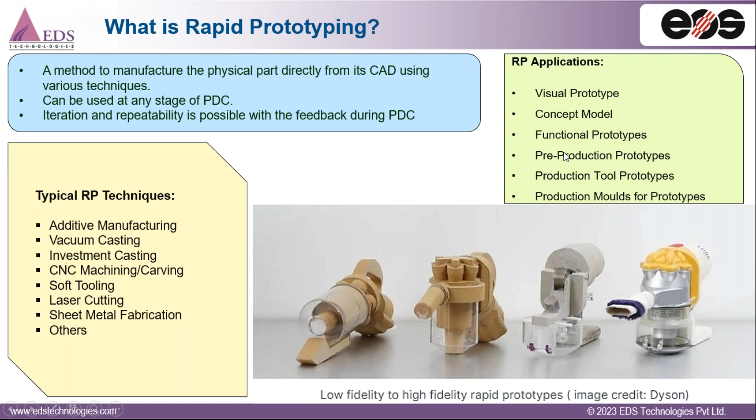What's additive manufacturing? It's very simple to understand the concept - you have a CAD model, and you slice the CAD information into hundreds and thousands of layers, and those layers are cured by a particular method, and that's how you get your final model through 3D printing.

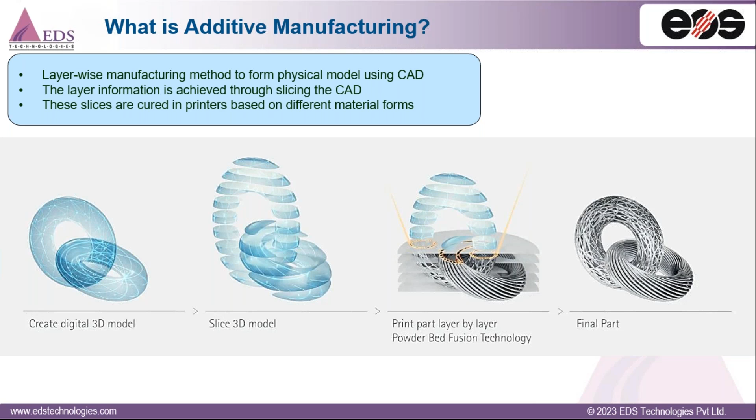Based on the materials available in the market, additive manufacturing has been classified into many types. Based on powder, there's selective laser sintering, SLS, selective laser melting, electron beam melting, and then there's a technology called DMLS, direct metal laser sintering, and powder-based binder jetting and MJF are also available.

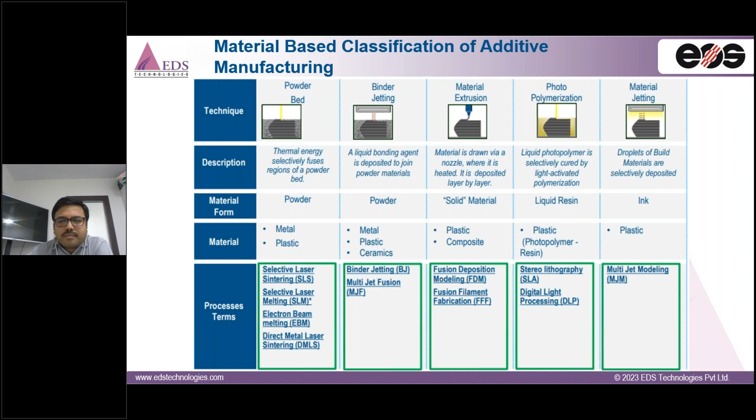When we talk about solid material, that technology is called fused deposition modeling, the FDM technology, and triple F technology, which is fusion filament fabrication. The third type is when the raw material is in the form of resin - we have stereolithography, SLA, and nowadays there's a trending technology, digital light processing, DLP. Finally, ink-based technology is available, which is multi-jet modeling.

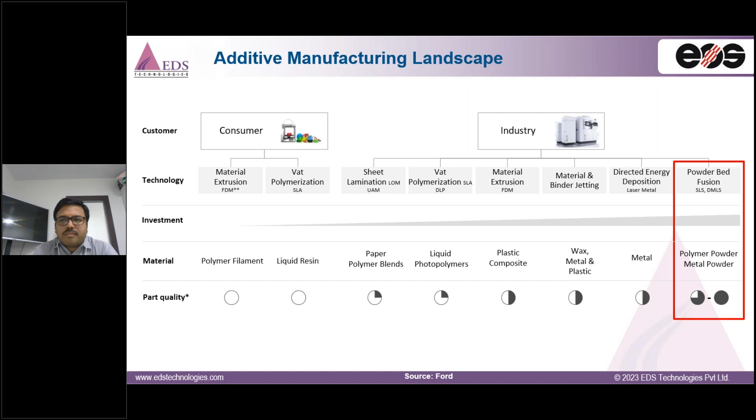Moving forward, looking at the landscape of technologies available for rapid prototyping, the most promising in terms of part quality is powder bed fusion technology, which is more reliable and gives prototypes with very high quality. It's evident from the study given by Ford that powder bed fusion technology is very trending out of all options available for rapid prototyping through additive manufacturing.

If we talk about performance-based AM technologies, we've focused mainly on metal-based additive manufacturing technologies - whether it's laser-based powder bed fusion, direct energy deposition, material jetting, electron beam-based powder bed fusion, wire-based DED, or material extrusion. There are several technologies available in metal also. We've seen that laser powder bed fusion has the highest potential to reduce cost, and it's very promising in terms of part performance and part cost. It's shown remarkable results when it comes to the end product of the prototype or any functional component.

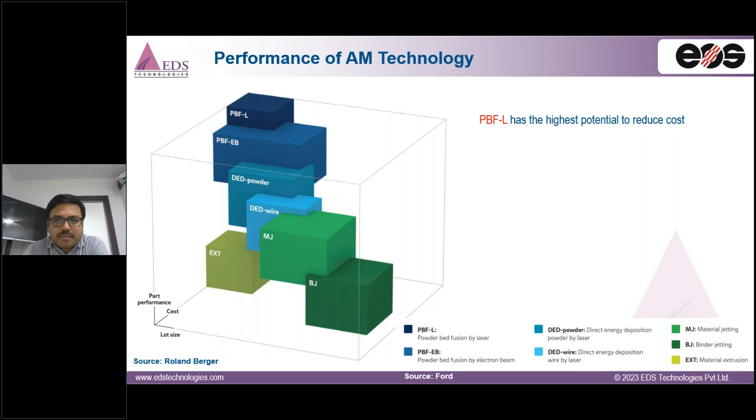In a recent technological survey, we asked approximately 87 AM service providers from different countries, and it's very evident from the graph that end users have been asking for powder-based, especially laser-based powder bed fusion technology, which is SLS and DMLS. 61% of responses were in favor of SLS and DMLS technology.

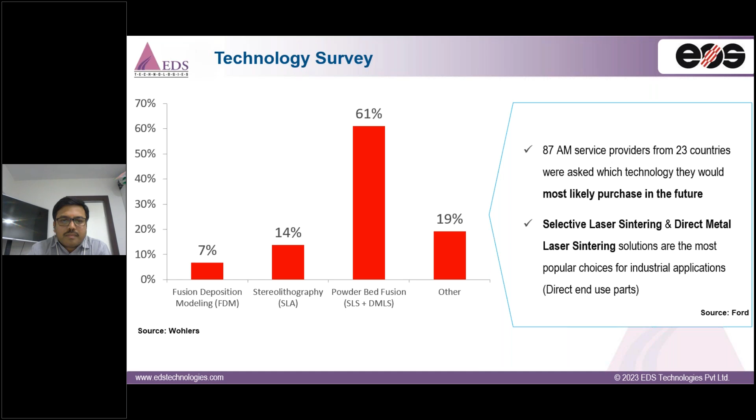So now we have seen the different kinds of technologies available. Few of those are emerging technologies, few are very old technologies. With this, we'll begin with our laser-based powder bed fusion solutions. So what exactly is laser-based powder bed fusion?

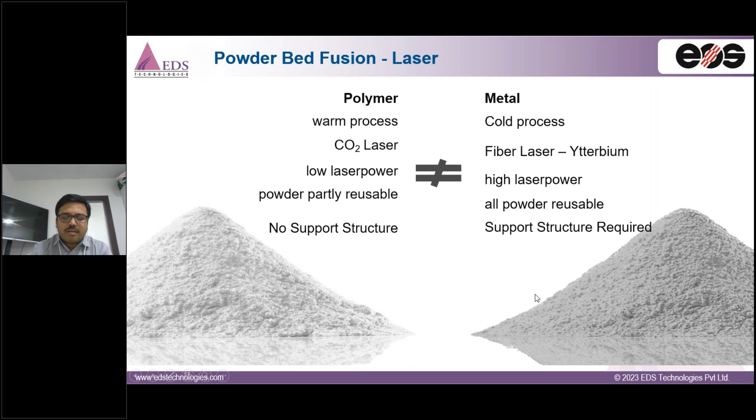Raw material is basically available in powder form. In case of polymer, the differentiation here is that the systems are different. Polymer systems handle polymer materials, and metal systems handle metal materials. They differ in that with polymer, we heat up the powder and sinter the cross section of the material with a CO2 laser. We can reuse the powder in this SLS technology, and there is no support structure required in the polymer scenario.

When it comes to metal, it's completely a cold process, meaning the powder doesn't get heated. In case of metal, it uses a fiber laser with slightly higher laser power, and all powders are reusable in this case as well, but you get some amount of support structure. Later on in the webinar we'll discuss how those support structures can further be eliminated.

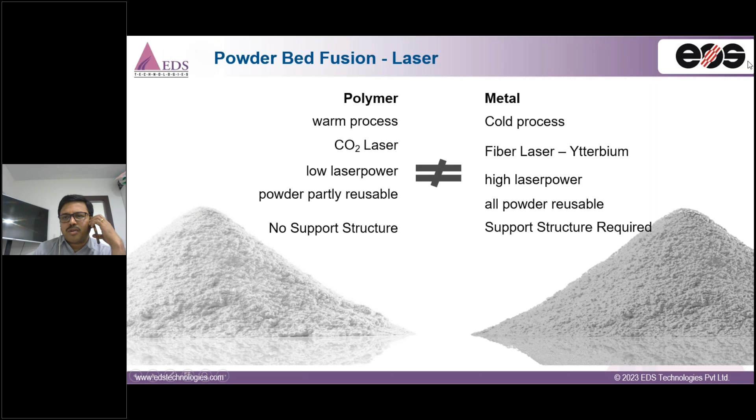So we'll begin with our first solution, which is SLS technology. SLS stands for selective laser sintering, as I earlier mentioned. It uses the laser directly to sinter the material, and curing is very fast within the chamber. The printing happens within a closed chamber. SLS technology is available in polyamide, elastomer, and styrene-based materials.

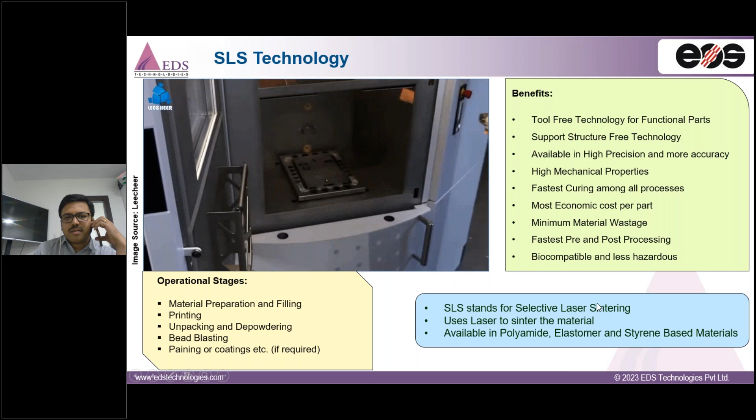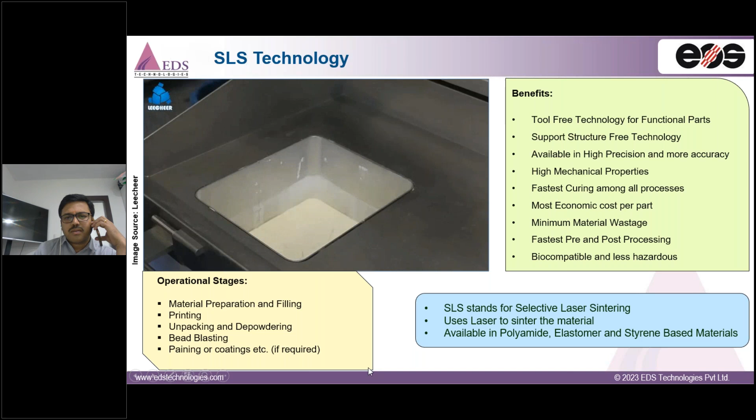The operational stages are quite simple. It's very easy to use SLS technology, EOS-based SLS systems. It just involves stages like material preparation, filling, and printing of the material. Then we unpack the printed materials, we depowder the components, and we do some sort of bead blasting, and then your parts are ready to be used directly as a functional prototype.

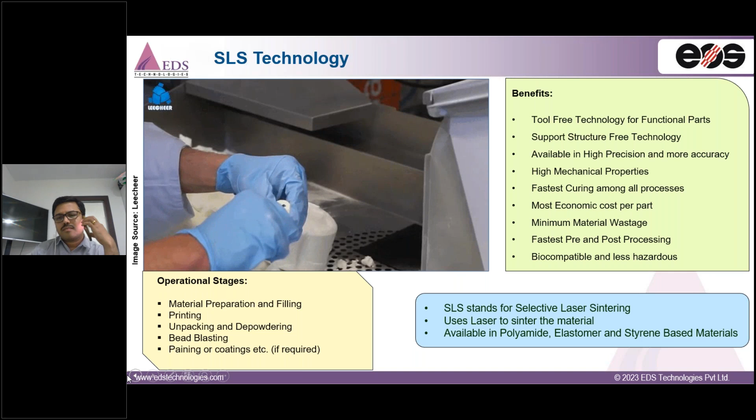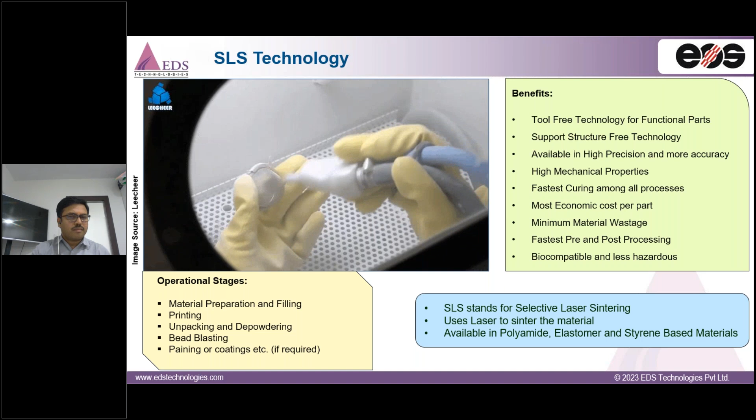The benefit of SLS technology is you get a fully functional and reliable part without a tool. So it's a tool-free technology, and it doesn't involve any support structure. So it's very easy when it comes to post processing. You can directly use your component just by doing nominal finishing.

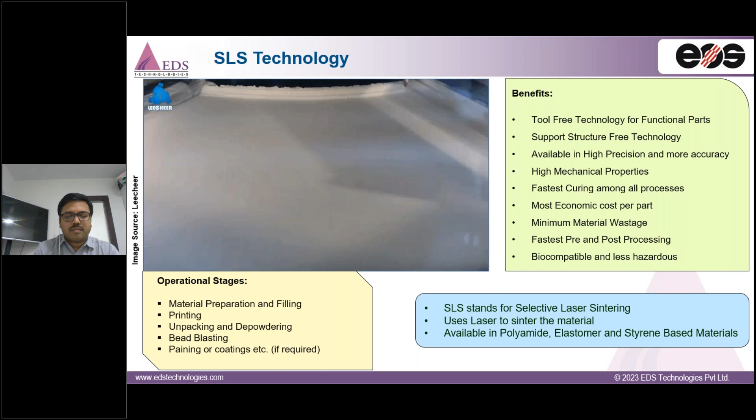It's available in high precision and more accuracy form also. So there is another laser which we use, called fine detail resolution, FDR, and it's pretty accurate in detailing the features of your component.

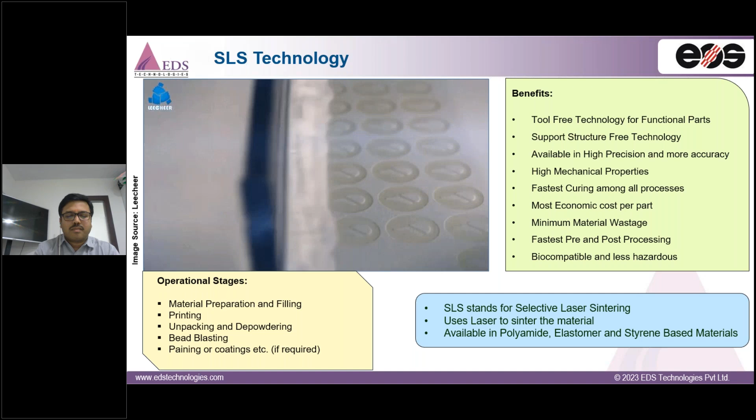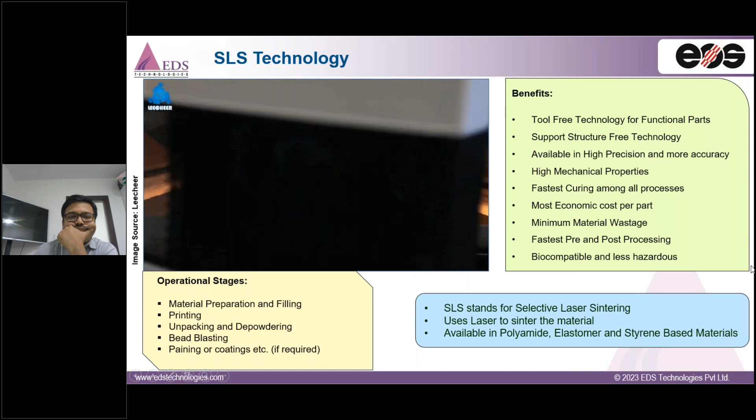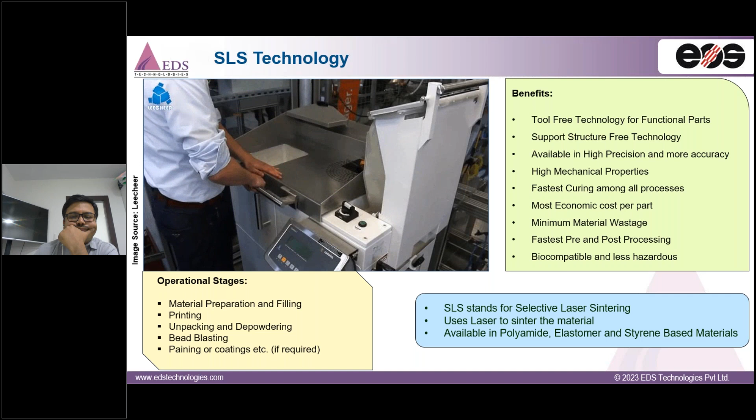The materials of SLS are high in mechanical properties. The laser process is fastest curing among all processes, because it just has to scan the area, and once all layers are finished, your parts are ready. So it's quite fast, and SLS parts are most economic when it comes to cost per part. So unit cost compared to all other processes, SLS technology gives a great and better unit cost.

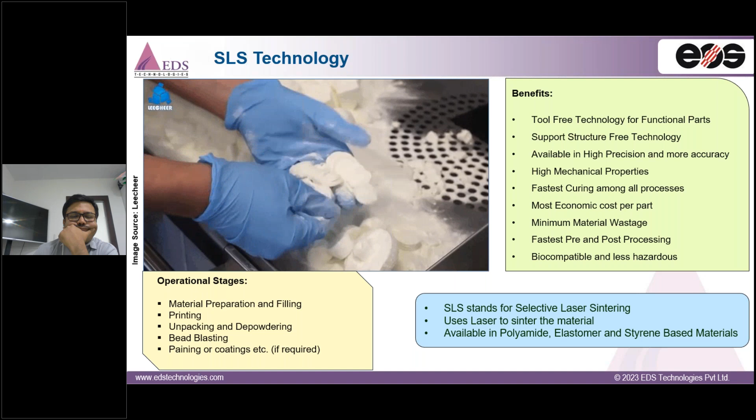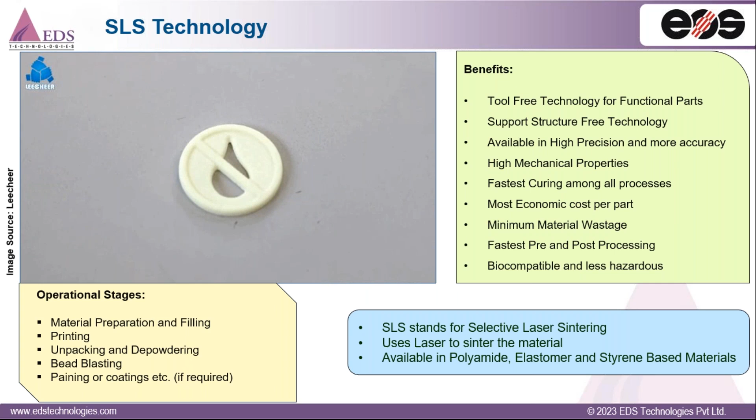And it's fastest when it comes to pre and post processing. It's very easy to get the machine ready for printing, do the post processing, and get the parts ready for further use. The materials of SLS are biocompatible and less hazardous when it comes to operations. You don't need literally any cleaning agents later on when you print the parts. So it's very good to handle, very easy to handle the EOS SLS technology.

Moving forward, what are the factors which better position the SLS technology among other powder-based technologies available in the market?

So this SLS technology is available with the purely polyamide based material, and you get your part just like injection molding does. In injection molding, typically you press the heated material in a cavity of the mold, and you get your part. Likewise, in SLS 3D printing, you heat the cross-sectional area and you melt that particular area to form your 3D printed part directly.

There is no filler, or there is no binding agent or detailing agent required in it. So further, it doesn't have any cost involved, and any challenges and timeline challenges involved in the process. It's just a quick process: you just start your build, and next day you get your part.

Though there is a natural form of the polyamide available, there are other forms of the materials also available. Like injection molding, you can get a glass filled material, and you can get carbon fiber and aluminum filled material also. You can get fire retardant materials, and fire retardant materials are FR classified and certified materials.

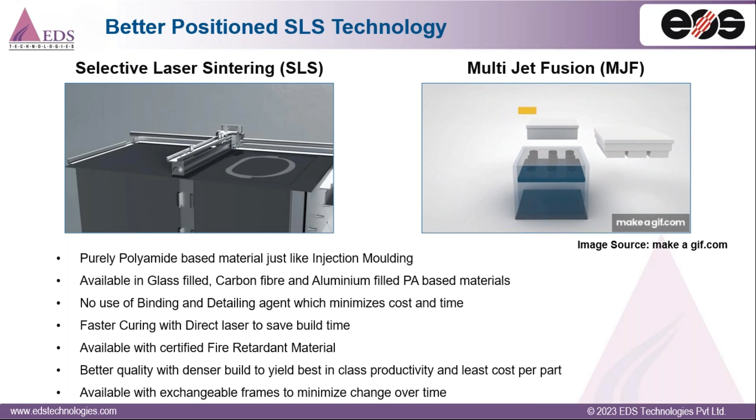And the SLS parts are better in quality, and you can fill as many parts as possible within the build chamber to densify and to leverage the space inside the SLS printing chamber. So doing this, you can have best-in-class productivity and least cost per part. It's available with exchangeable frames and all other accessories, which minimizes the changeover time. So that's how the SLS technology is on top of any other technologies available in the market.

Coming to SLS versus FDM comparison, there are many. First of all, there is no apple to apple comparison of the SLS technology and the FDM technology. However, sometimes in industry people have a mindset and they correlate 3D printing directly with FDM, because it's more seen in the market. So they feel 3D printing is only available in FDM, but FDM is a very initial technology, and it's very basic technology. With FDM, you can print parts just for realization, but you cannot use them in as good a manner as you can with SLS parts.

So when it comes to cost, SLS parts you can print literally with no support structure, so there is no additional cost involved in the SLS process. While in FDM, you have to invest in dissolvable or non-dissolvable supports that will be again hectic when you go to post process them, and it involves many costs that increase the per part cost.

And the materials that are available in SLS are all industrial grade certified materials, which are biocompatible and fire retardant compatible. They're leak proof. They've been tested for leak proofness, and there are many more certifications available with the SLS materials. While FDM materials are very basic, and it's just to realize the concept of the model or the CAD.

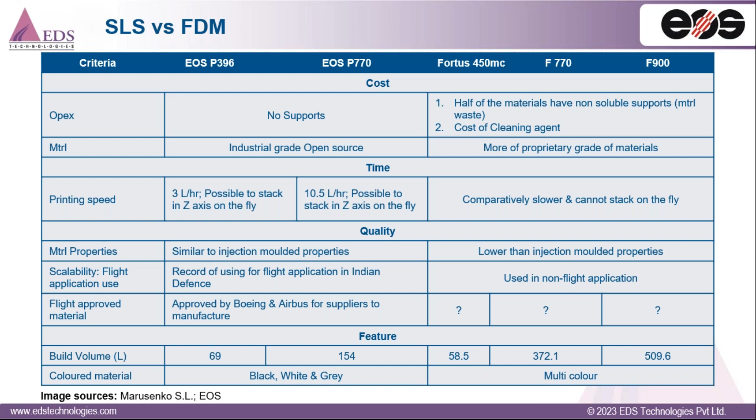SLS materials are available in black, white, and gray, but later on you can paint them. You can do the post processing as per your application. You can use them. FDM materials are available in many colors because of the fact that they can be used for fancy models and all.

When it comes to choosing additive manufacturing or any polymer material for the application, you have to decide on certain criteria like service temperature or heat deflection temperature, or the kind of polymer, whether it is chemical resistant or water absorbing, or whether it's a commodity polymer, an engineering polymer, or a high performance one. So in EOS SLS systems, we have various categories of thermoplastics and a few amorphous materials.

We have polystyrene based material. We have a broad category of nylon based material, which is engineering plastic, and offers you a service temperature of more than 110 and 120 degrees at least, and even more with the glass filled and carbon filled materials. Then we have high performance polymer alloys, which I'll discuss later.

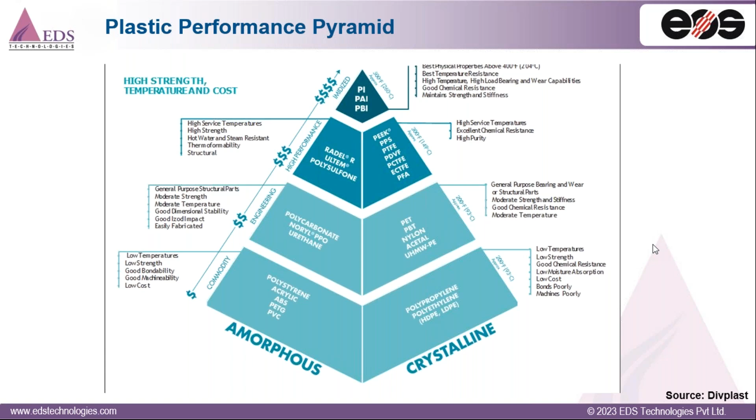And we have exclusive polyamide material, which is a mixture of polyamide and aluminum. Then we have a polyamide 11 material also available with us, which is more elastic compared to polyamide 12. And all these polyamide materials are very much reliable, and they can offer you the properties in a very good way that no other technology can give.

And then we have PrimeCast and polystyrene based material, which are used typically for the investment casting process and in packaging industry. We have elastomer, which is urethane based thermoplastic material used for your seat or cushionings or any kind of application which requires rubber like properties. And then we have high performance polymers, which are PEKK carbon filled and PEEK material HP3. These all materials are processable through EOS systems.

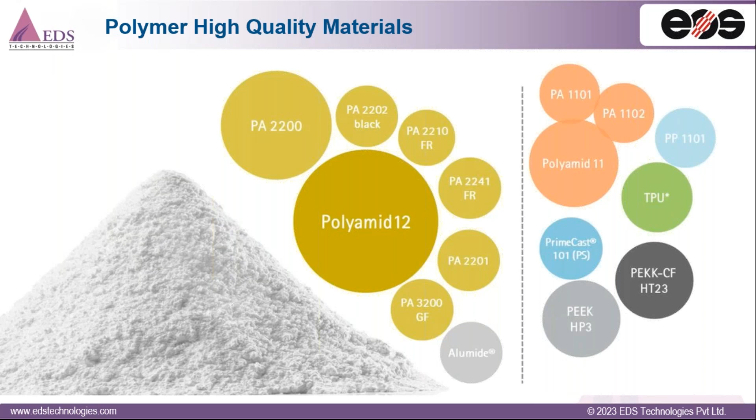So when we call polymer high quality materials, we mean it with the fact that the properties which are tested on all material are up to mark. So let's see what the properties say. We have prepared a thorough comparison between the injection molded materials and the additively manufactured materials.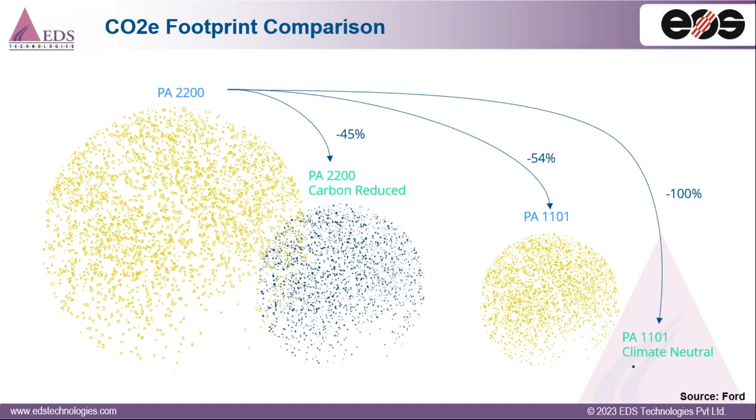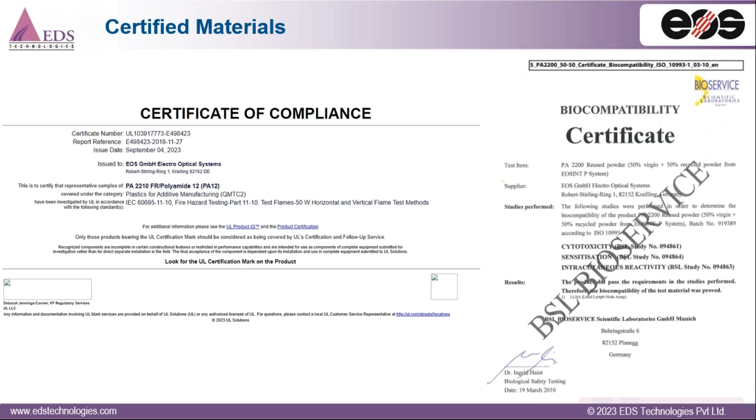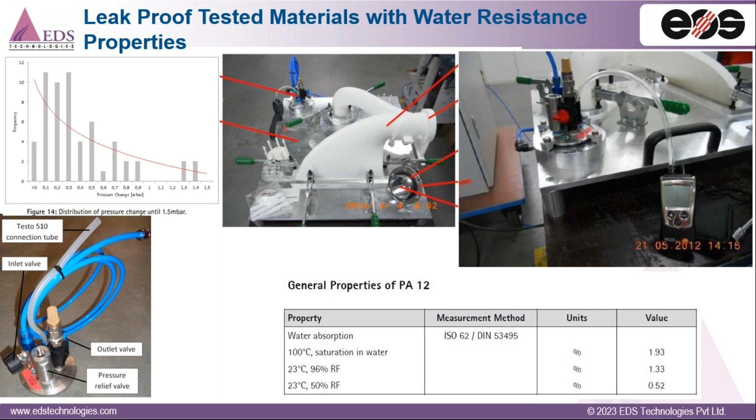So EOS SLS materials are all well certified for fire retardant applications, well certified for biocompatibility. And we have even tested the polyamide SLS printed components for leak and air tightness, as well as water resistance. So the material has shown significant water resistance values, and has shown very good leak test results. When you do post processing like vapor smoothing, you can further improve the water resistance in the material.

So from here, we'll begin our other technology, which is again a laser powder bed fusion, named DMLS. DMLS stands for Direct Metal Laser Solidification. It's kind of a micro laser welding process where hundreds of thousands of layers weld together to form the 3D model in an inert atmosphere. So with the fact that they are inside a closed chamber, the probable defects are very minimum in the material. The chances of porosities and foreign particle inclusions and defects are very minimum in this case.

DMLS is available in aluminum alloys, steels, titanium, copper, nickel, cobalt chrome, and many other alloys, which are already tested and proven for EOS metal systems. And the technology is open to develop new materials as well. So you can use the same system to develop and convert the conventional form into powder form, and then develop it for your printer.

The operational stages for this are very simple, in the fact that you have to understand the technology, but it involves stages like material preparation and filling, same as SLS. You have to do sieving of the powder, and then refilling in the machine, and then you have to start the printing.

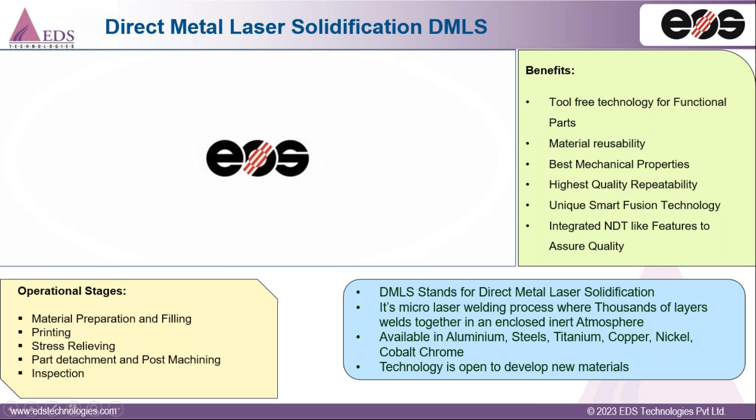So DMLS process is available, as I mentioned, in the form of the material. The types of materials available are aluminum alloys. There are several kinds of aluminum alloys you can use for your PDC castings, or for your sand castings or investment castings or extrusion forms. Any kind of component used in the industry, you can print directly without tooling using the DMLS process.

You can use the case hardened steel. The cobalt chrome material is available. Various kinds of stainless steels are available, SS17-4PH or 316L, or there are many more stainless steel materials available. There are tool materials also available which you can use for your pressure die casting or injection molding tool manufacturing, or even if you want to make a soft tool or any other tools, you can use these tooling alloys.

And this is available in titanium alloys. Nowadays it is available in copper alloys also. You can print a copper alloy, or you can print a commercially pure copper material directly through the laser based system. This is available in a broad category of nickel alloys also. You have a nickel alloy which you can use for applications like high temperature or high oxidation resistance or crucial environmental applications. You can use this material over there.

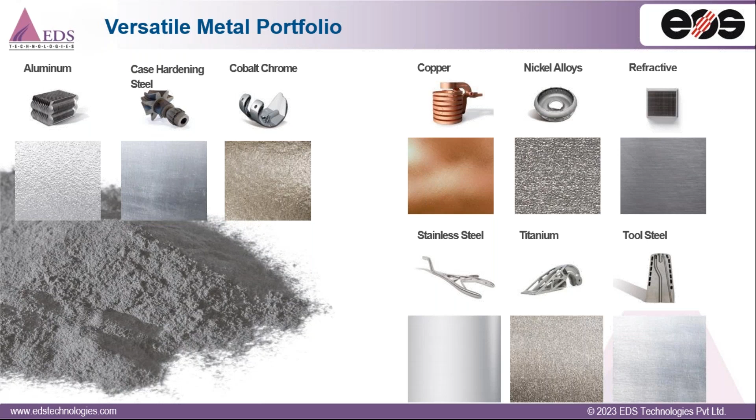So coming to the TRL, which stands for Technology Readiness Level Process Development, EOS classifies the technological maturity of all self-developed 3D printing SLS polymer materials and even 3D printing metal materials and processes using technology readiness level. So what are these TRLs? The TRL concept was developed by NASA and has since established itself in various industries.

EOS also divides its materials and processes into two categories: core products, which typically span TRL 3 to 6, and premium products, which span TRL 7 to 9 and are ready for use in series production. One of the goals of the system is to offer new materials on the market with a clear value proposition. So this is how we place our processes with respect to the standards that are available.

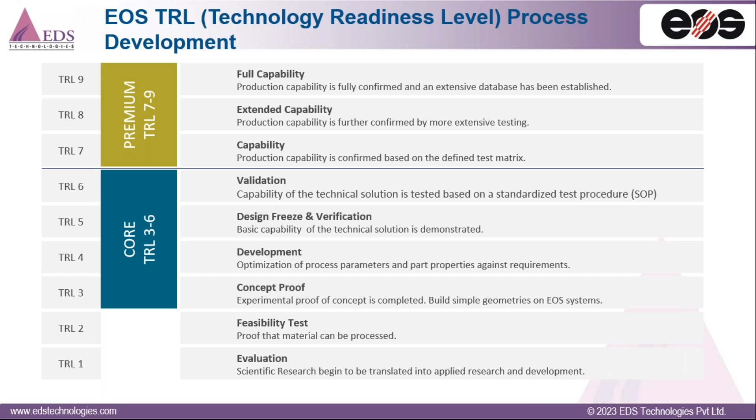So I was explaining about the smart fusion. Smart fusion is again an add-on with the EOS system, and a unique value proposition is that it's a thermal management system where we give the command to the laser to calibrate and change over within the process from layer to layer. Wherever the IR sensor senses the heat concentration, the laser decreases or increases the power, or vice versa, to reduce the stresses, and thus you have a chance to reduce the support structures.

You can increase the productivity. So the benefits upfront of adopting this technique: it's been seen that up to 75% of support structures can be reduced roughly, and you can increase the productivity 2 times to even 5 times. It's been seen it is improved, and you can lower the cost per part.

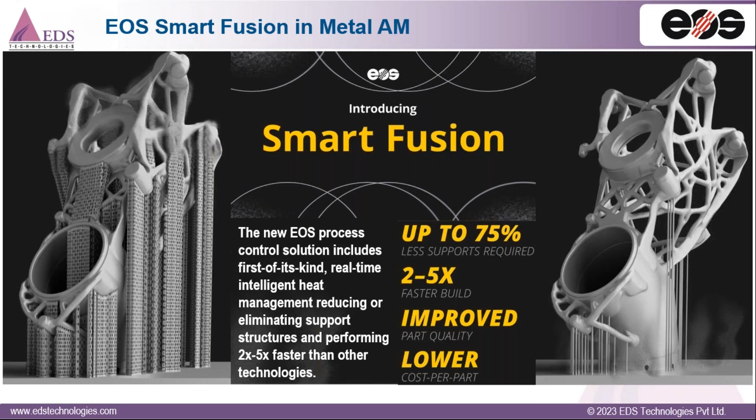So far, we have discussed prototypes. You must be thinking, well, are these AM systems available only for prototyping, or is there scope for production also? So in order to understand production, we first need to understand the trend of AM across industries. In early days, we used to think additive manufacturing is only used for prototyping purposes. Then some time back, we started doing small production batches, and started improving part quality, process robustness, and even optimization of cost per part.

So today we are at a stage where production can be ramped up with the best quality control and quality repeatability, and differentiation in many factors involved in the processes. The total cost of manufacturing can be reduced, and the system can be more automated with technology integration. We are also seeing the future. We have been seeing the trend in a few developed countries like Singapore and Germany.

People are facilitating multiple additive manufacturing machines, and they're calling it a print farm concept, which we call a digital factory. So you can literally have an AM cell within your plant, and you can have a SCADA-based system where you just give a command to the AI-based, optimized systems, and they will do the job for you, and literally it will guarantee the production. So that's how the evolution of additive manufacturing is working nowadays.

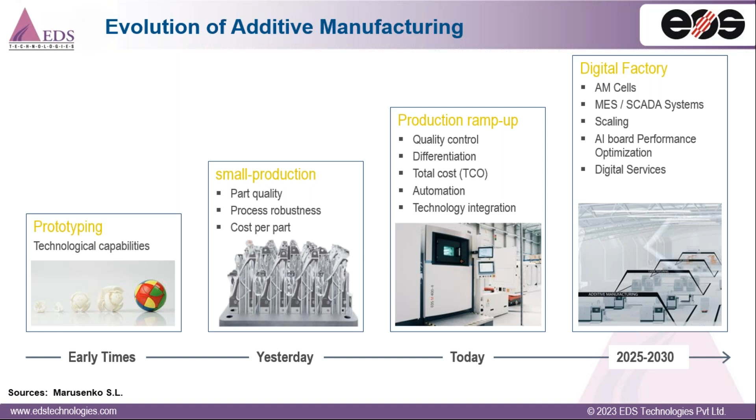So when we think about production, we first have to look at the cost per part, CPP, or unit cost in normal language. The first factor which comes to mind is the design. You have to optimize the design for additive. You have to focus on how you can optimize it further to reduce the cost, and then you have to look at the pre-processing, production processes and post-processing.

So these are the main factors where, if you apply optimization and establish a good value chain, you can end up with a good, reduced cost per part, which improves the chances of converting the part to production for a particular machine or AM system. So like any other technology, break-even exists, even for conventional.

So we tried forming a graph between the unit cost and the complexity, which we call a complexity graph. And on the other hand, we tried forming a graph between the unit cost and the volume. So with design complexity, where are the AM parts placed? Basically, it's been seen that additive manufacturing is applicable wherever the design is complicated, wherever subsequently the processes are complicated. So if your design is pretty complicated, like complex castings or injection molded complex parts, it has more chances of getting converted into additive manufacturing.

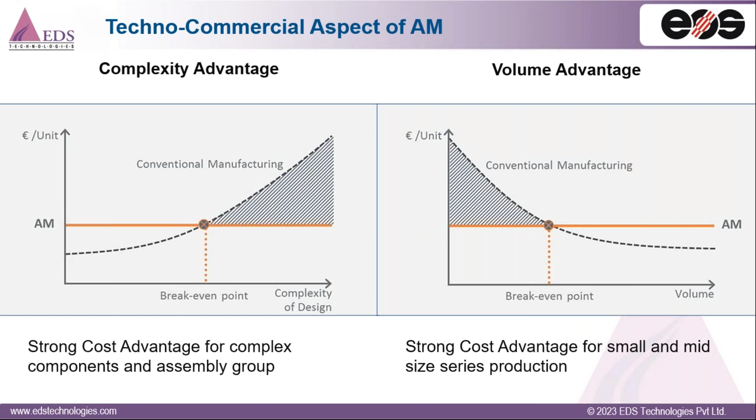If you are able to choose a part in the mid-size or small-size category for your particular system, that's where you start picking up, and you can implement the AM production process for a particular component and a particular system. So by reducing the mass, by optimizing the topology, by reducing the size of the overall component, and of course, the quantity matters based on your requirement, you can switch to AM production systems, for example, for spare part manufacturing or customized parts.

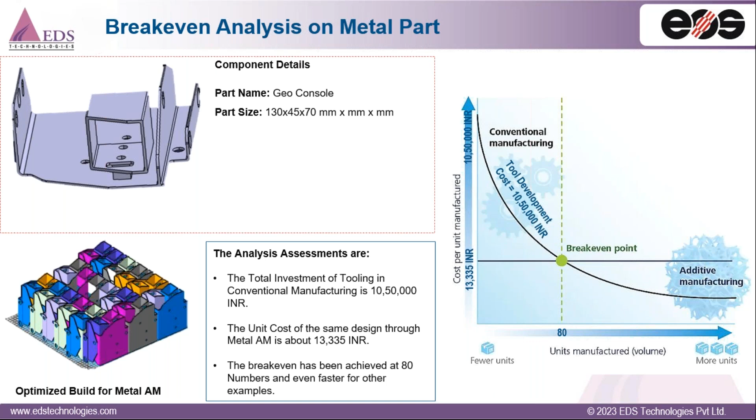So here, in order to better understand, we have placed one case study on a geo console of an automotive. It's a fabrication model which is manufactured through different kinds of sheet metal operations followed by welding. So the best part here is with additive, we have leveraged the benefit of consolidating the child parts and making it in an integrated way.

For a particular AM system, we have seen up to a certain number of quantities, which is 80 quantities, additive manufacturing has shown its best cost over conventional manufacturing. So it's very much evident. It depends: the production depends on how you are selecting your component, how you are optimizing your design, and what system you are using for the production.

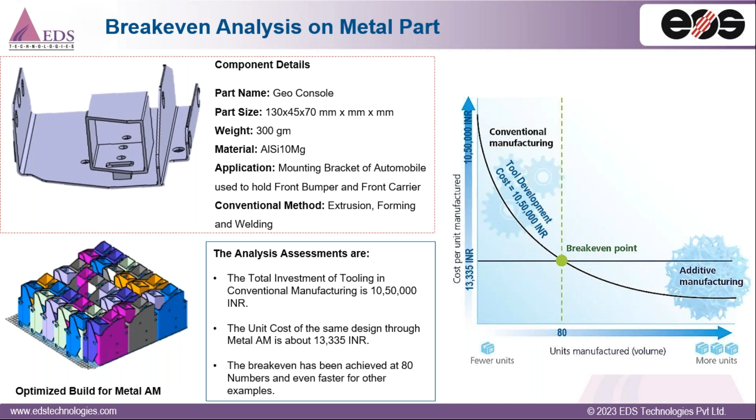Moving forward, let's try to understand what is not value addition, or what we call the conventional approach. So far, whoever is using additive manufacturing in the industry is following the conventional approach. If we divide everything in the form of a value chain, we get 4 stages: complex design, AM production, manufacturing process, and functionality of the component.

So the perfect case scenario is that parts have to be optimized for AM, while in real case scenarios, we always try to manufacture the part designed for and meant for conventional manufacturing. So that's where we are not able to leverage additive manufacturing. The second value chain parameter, production.

In the third value chain, manufacturing and assembly, typically we think that we'll be integrating the assembly. We have a chance to do the optimization, and we can reduce the number of assemblies. But in the real case scenario, we make the components individually and we try to assemble them in a conventional manner. That's why we are not able to leverage additive manufacturing technology for production.

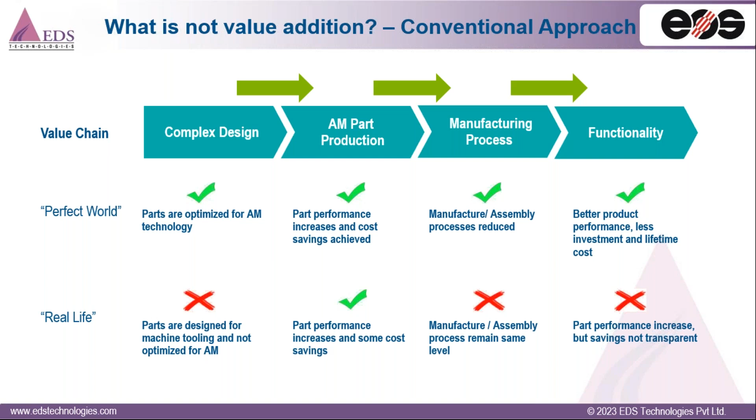So we saw the bottom to top approach. In order to leverage additive manufacturing technology, we have to do it the other way around, the top to bottom approach. We have to reverse it. We have to look at the functionality. We have to define the key value drivers responsible for functionality, and then we have to optimize the processes.

You can evaluate the cost savings there, and then we can establish the production process based on the production needs, and looking at all 3 factors, we can redesign the component and apply design for additive manufacturing, which will be suitable for additive manufacturing, and you can easily adapt the production method.

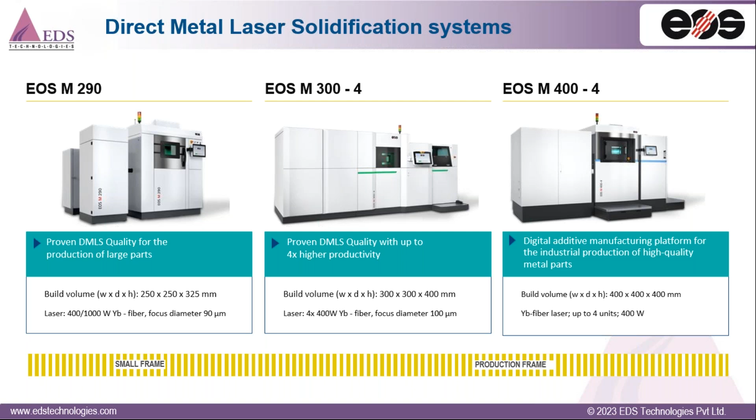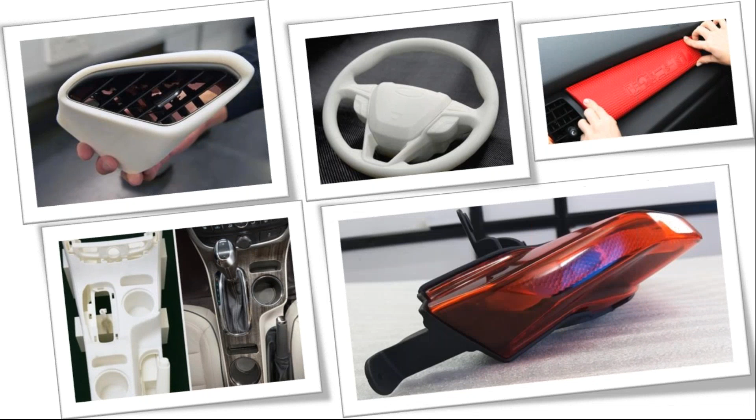So what are the different applications available in SLS? You can look at developing interior parts. There are many more applications which you can develop through SLS technology, all interior and functional parts. You can print dashboards, on-demand parts, AC vents, central consoles and optical parts, and even optical housings. Exactly.

There are applications where you can use FR material to develop battery casings and battery products, charging stations components, charging plugs, fuel tanks, exterior components, molds and seating components. There are so many applications that you can implement SLS technology into.

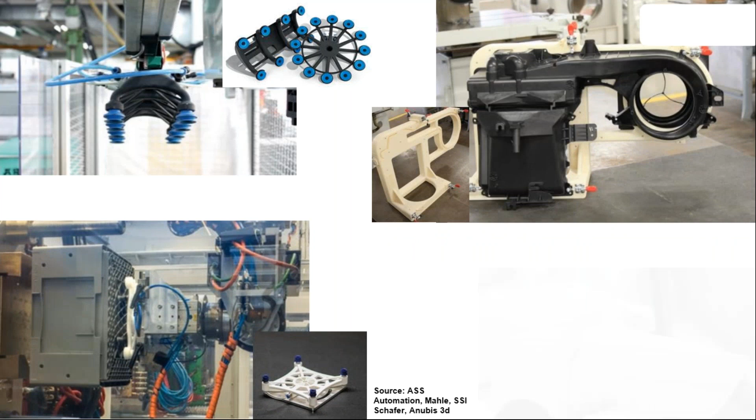You can also use this technology to manufacture fixtures or manufacturing aids, be it a testing fixture or a machining fixture, in either SLS or DMLS technology.

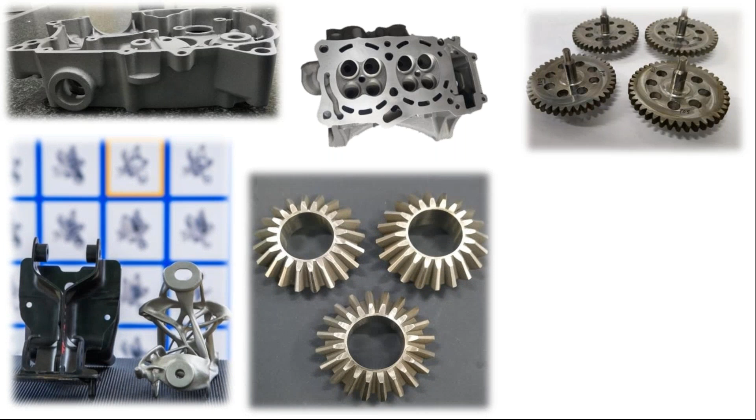Now moving to DMLS, metal 3D printing. With metal 3D printing, you can print PDC parts, different casting parts, forging parts, sheet metal fabrication parts, laser sintering parts, gear sintering, and customized toolings to perform machining.

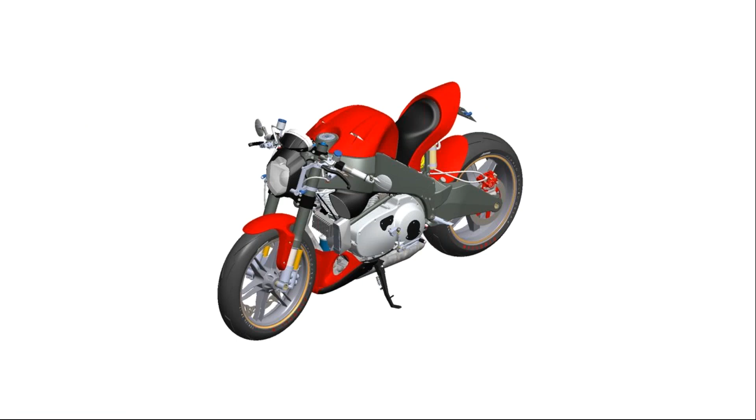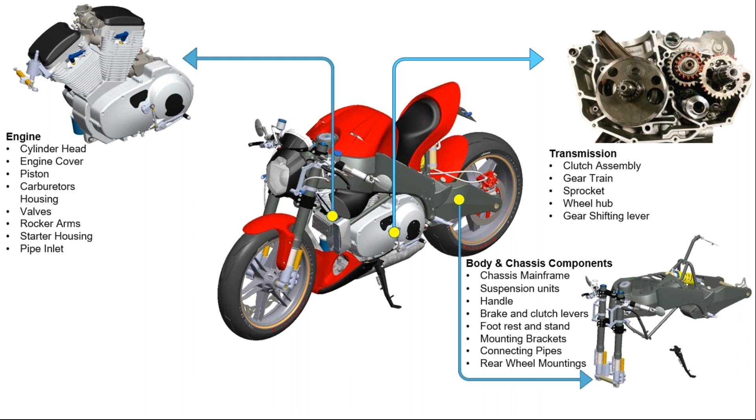For the last two decades, industry has been developing different kinds of components, from the engine segment to the transmission segment. In a typical two-wheeler, we can see body and chassis components, and exhaust components. There are many more applications that industries are already doing for prototyping.

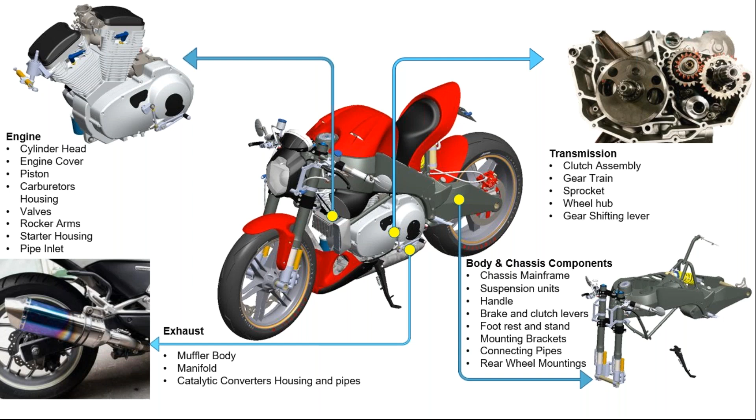And for batch production also. In a typical four-wheeler, there are so many subsystems, starting from the engine, or in case of EV drive motors, we have copper material for the application of drive motors. You can look at any component out of these two categories, polymer and metal, and develop those using the additive manufacturing SLS and DMLS processes.

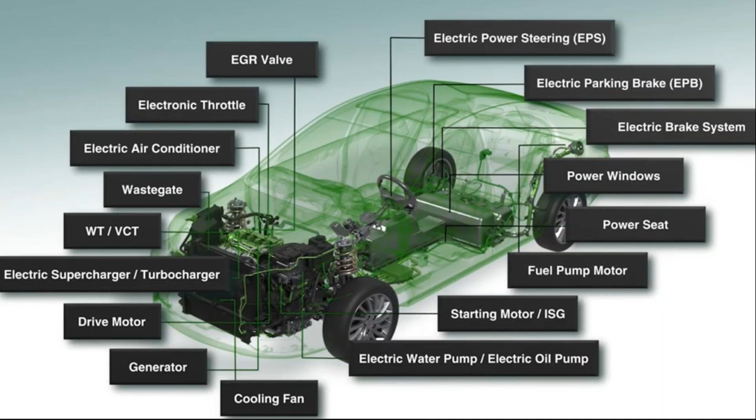Thank you, Arun. Hi everyone. Arun has given you very wide applications of additive manufacturing. I wanted to drill down to two value additions that SLS and DMLS technology bring to the automotive industry.

Just like any industry, we use tools - that's number one. Secondly, we make direct products as well. With regard to tools, we have multiple varied tools, right from manufacturing jigs and fixtures, assembly fixtures, and so on and so forth.

One very unique application would be die-cast tools. This is one such part done by one of our customers overseas. This is an HPDC part made with aluminum. The end product is aluminum, and they see some areas where smudges are being formed.

Some thermal mismanagement is happening, so you have a very high hotspot. Things like that go wrong, right? So they told us, okay, what do we do about it, because our end product quality is going down?

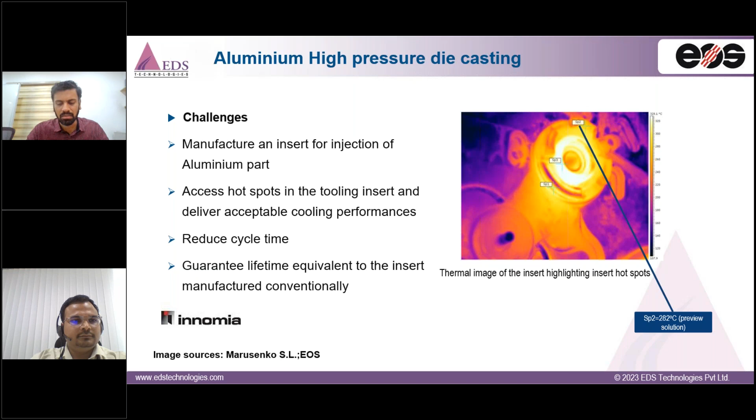Whereby you could avoid all these product quality related issues, whether in soldering, or if you wanted to increase productivity, then probably during your cooling time you can reduce your cooling time because you remove the heat directly from the product, in a very fast manner. So this is what they have done.

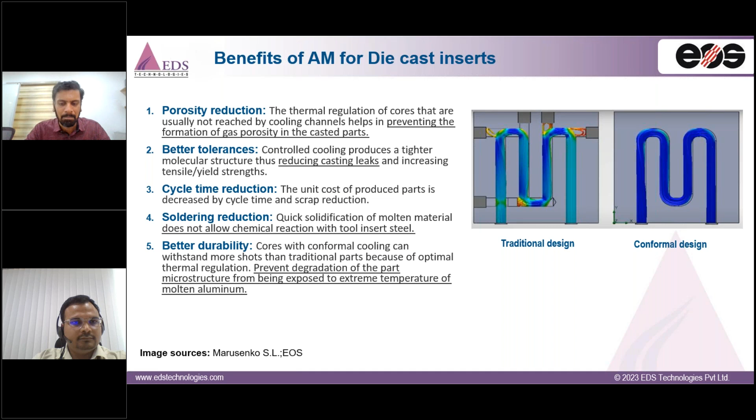They changed the design which goes inside for cooling, and whereby now the hotspot, which was 200 plus degrees, is just 100 plus degrees. So if your hotspot reduces, then probably you have better cooling time, which means your cycle time reduces, which means your productivity increases directly. So this is one unique advantage I see, where a little engineering could help along with additive manufacturing.

Now, we are not into very mass production, so if people ask me when will additive manufacturing go into mass production, I say we start with tools. And this is one such application.

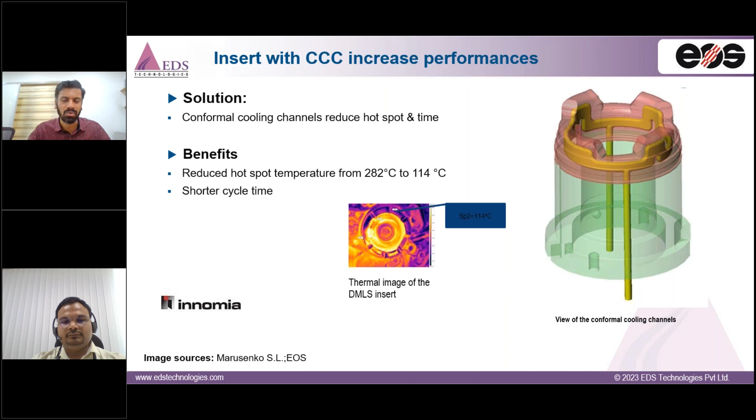Right after that, we machine it. So people also ask us, okay, I have a part, can I print it and get the finished part directly? No, it is not always the same. We have some post processing to finish it, depending on different applications.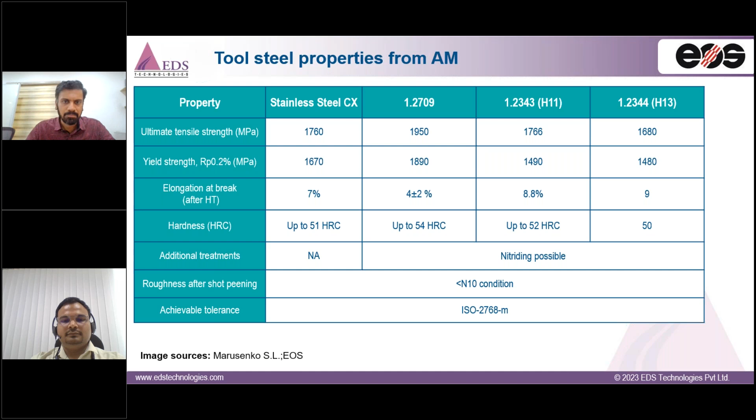This is one such application done for Silverado, the four-wheeler truck in US, and they wanted to reduce the build time. So there's one application where they introduced the conformal cooling channel and were able to realize this application.

Coming to direct parts, predominantly automotive industry was the one who drove the rapid prototyping market, right? So under rapid prototyping, we had vacuum casting technology, wax modeling, wood modeling, and so forth. And then came 3D printing.

Now we are moving from this proto to pilot production stage, and in some cases direct production, such as in EV also. If you ask us, overseas we have three categories of applications that OEMs are driving.

Number one is customization, where if somebody wants to have a unique feature for their cars, a very personalized feature, then they go ahead with customization.

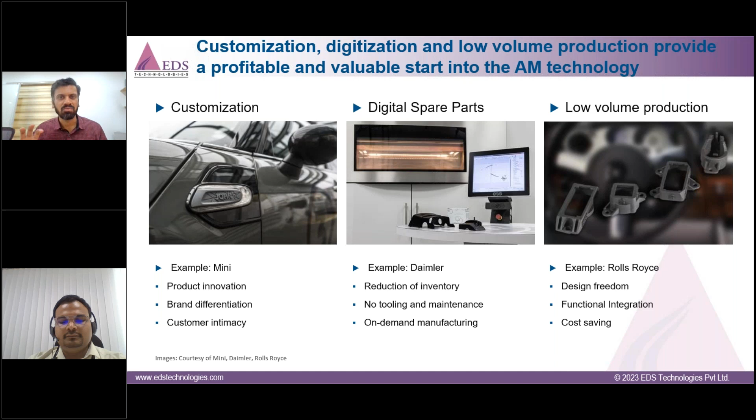And somebody wants to reduce their inventory to minimize their supply chain, probably then they go ahead with digital spare parts, aftermarket parts. And sometimes you can also do low volume production for some of these parts, where the tooling cost could be higher than 3D printing.

So this is one such application done by Mini, basically side scuttles and trims where you can write your name and then print it in, and it is very unique for your application. Of course, the value here is a customized product.

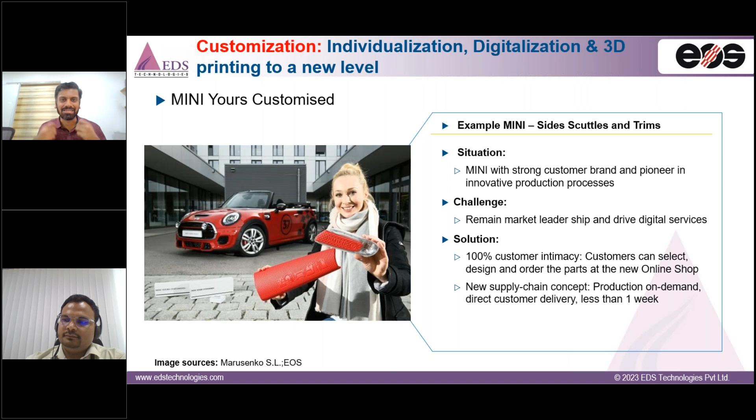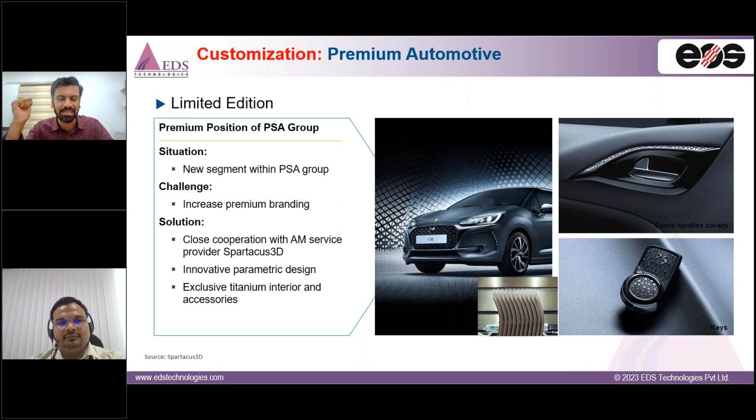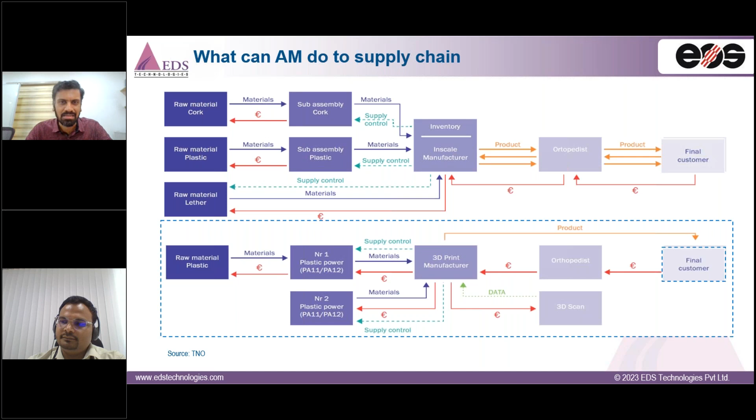I take this example from the medical industry, where let's say a patient has a fracture and goes to an orthopedist, who says, I have a standard set of implants which I get from a manufacturer, and then I give it to the patient. Now, what if the orthopedist goes to a 3D printing manufacturer? He just has the raw material, and it is very unique to that customer, suiting their requirement. This is what the customization industry is also thinking about - can I make a customized product for one customer? This is the value they think about, and of course there is a little premium to it, so cost also plays a factor.

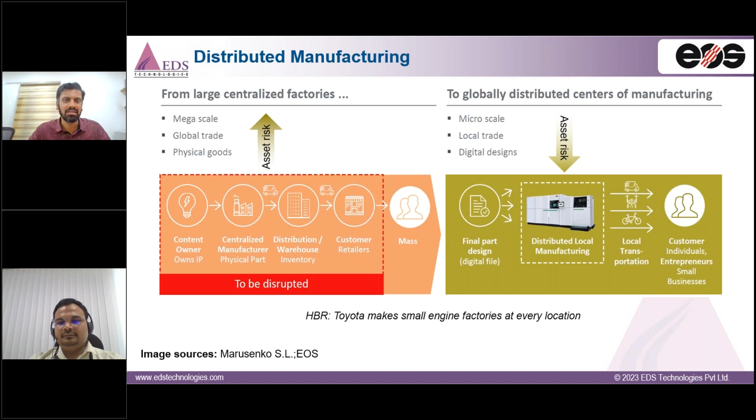I read recently in a business review that Toyota makes small engine factories wherever they go. Whereas in one case, GE Appliances had a very big factory and there was a fire accident, and the losses were phenomenally high. So the idea is, can we have a very modular industry, very localized to that particular geography or demography, and then meet those customers' needs? That's the thought process.

So what CAT did is, this is one of their excavator products, and they printed it in 80 hours time, roughly about 4 days, a metal 3D printed part, and delivered it in 4 days time. Really amazing, right? Instead of shipping from one country to another, it was locally printed and given to the customer in 4 days time, less than a week.

I think that makes a lot of economical sense. Similar to that is Daimler, who have also done a number of these parts. Almost 3 lakh parts were there for EvoBus buses. Some of these buses are very obsolete, and we cannot carry the inventory for a very long time. Especially if we work with defense, we come in saying that for 10 years we at least support your asset. But beyond that certain period, how are we going to sustain these assets? It's a big question mark.

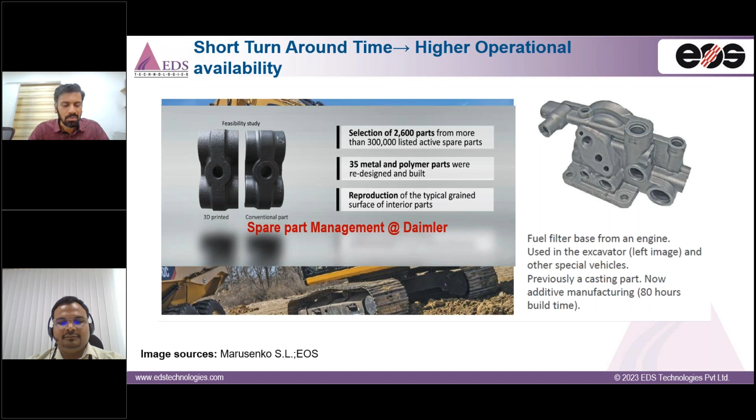So they came to us and we worked along with them to screen these parts for additive manufacturing. We said, among 3 lakh parts, 2,600 parts will be suitable for additive manufacturing, for which you don't have to carry the inventory. Some of these parts were redesigned for additive manufacturing where they could enhance their functionality. The one you see here is basically a conventional and 3D printed part, how they are using it. So that is how the localized factory is planned to go.

Another question people ask us is, okay, additive manufacturing, fantastic geometry, good value additions, and everybody is looking at additive manufacturing. What will it offer? The biggest question is, how about the cost? Is it affordable? So let's say we work in lathe or CNC, we work with parameters such as speed, feed, depth of cut, hardness of workpiece, hardness of tool, and so on. We control these parameters in such a way that we meet the customer's requirement.

Similarly, additive manufacturing has a number of these parameters. They work around with these parameters and try to meet the cost without sacrificing the quality. There's no trade for this quality, but how can we reduce the cost by optimizing these process parameters based on the need?

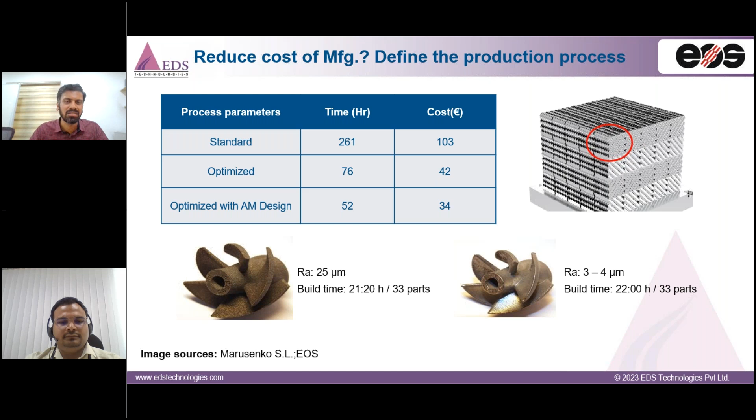One such example is here. Maybe as a standard parameter, this gives you an RA value of 25 microns and a build time of roughly about 22 hours for 33 parts. Now, if you work a little bit on the parameters, you'll be able to achieve better surface finish in as-built condition itself, with roughly about a 40 minute increase for the same 33 parts. This is where the intelligence of man comes in. Machine can do certain limit, but the direction that the machine can take is given by man. So we have to use our engineering minds and see how we can optimize the cost.

Here is one example where they have replaced injection molded materials because of very low quantity, less than 50,000 pieces per annum. In plastics, they have done it, and today they have printed more than a lakh of parts, directly replacing injection molding. This is where Arun also showed you a table where he compared the injection molded Polyamide 12 and the 3D printed Polyamide 12. It overlaps within those tolerance bounds.

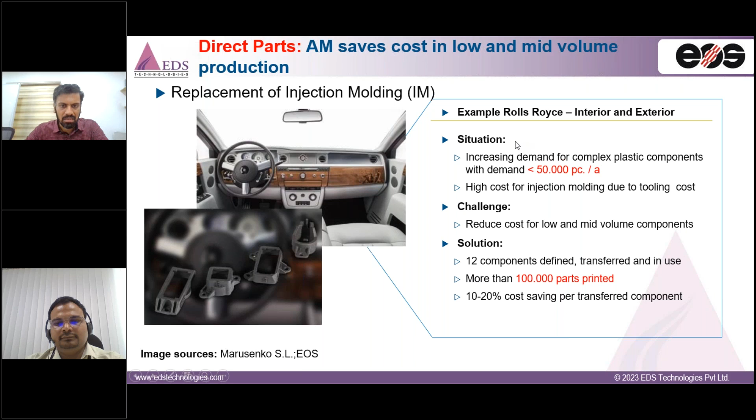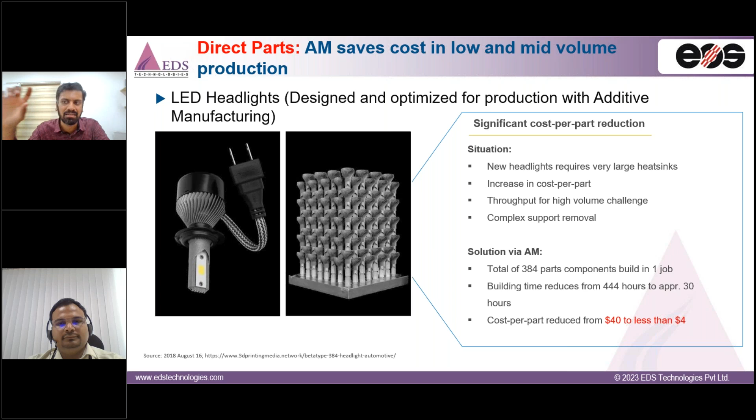Similar to that is a metal application where we have these LED heat sinks that go behind our lamps. If this had to be printed earlier with the standard parameter, it was $40. None of us would buy a $40 heatsink which we don't even see in our car on the surface - it is not a garnish part. But after optimizing, it was affordable at $4. From $40 to $4, that's a phenomenal reduction. And this, if you ask me, I can afford it. So this is where we need to realize how we can optimize the cost, thereby reaching the exact critical to quality elements of our customer.

So I stop here. I feel this is a better time to wind up our webinar, where I hope the audience have a good understanding about additive manufacturing and its applications in the automotive industry.